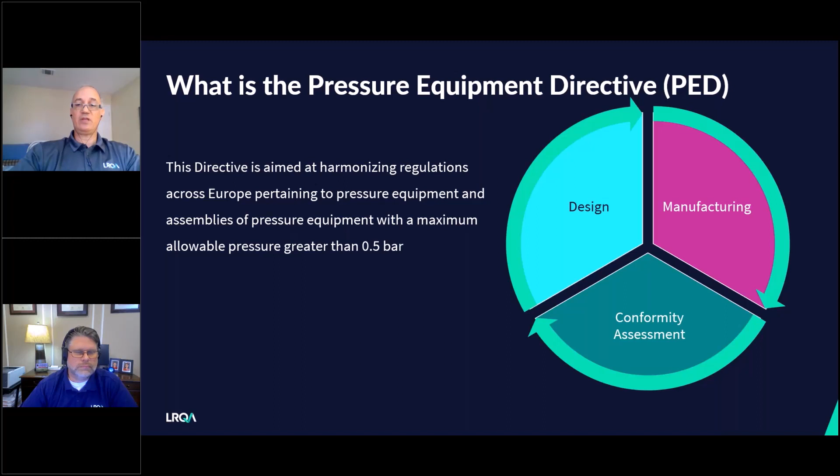A few examples are simple pressure vessels covered by the Simple Pressure Vessel Directive, transportable pressure equipment, equipment specifically designed for nuclear use, failure of which may cause emission of radioactivity, engines, including turbines and internal combustion engines, steam engines, gas or steam turbines, turbogenerators, compressors, pumps, and actuating devices. Vessels designed to contain liquids with a gas pressure above the liquid of not more than 0.5 bar. Please also note that PED does not deal with in-service requirements, which may be necessary to ensure the continued safe use of pressure equipment.

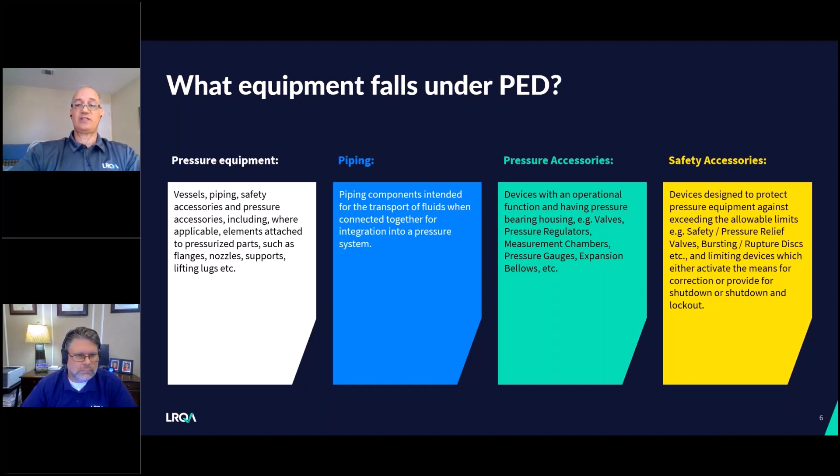What equipment falls under PED? These are pressure vessels, heat exchangers, horizontal or vertical pressure vessels, boilers, steam generators, fire extinguishers, pressure cookers, piping components, valves, actuators, pressure regulators, pressure or safety relief valves, and bursting or rupture discs, to name a few, as well as assemblies, which could range from simple assemblies such as a pressure cooker and fire extinguisher to complex assemblies such as water tube boilers, industrial installations, like refineries or chemical plants.

Dwayne, over to you, sir, for this slide. Thank you, Paris. Appreciate it.

Well, you may be asking yourself, what are the benefits of certification? Well, there are several major ones. The first one would be expanded markets and access to international recognition. And you do this by achieving compliance. You're able to expand and reach your organization's market and show global organizations that you're a serious player in this market. The second one would be legal compliance, a very important one here. By complying with this standard, you will ensure that you will not be found out of compliance and have to face fines or loss of business, which can be very significant.

Also, mitigating risk. By complying with PED, you'll ensure that you not only limit your risk and legal issues pertaining to compliance, but you'll mitigate them for the future and for your clients. Also, the last one would be quality assurance. We're going to ensure the quality and efficacy of your organization's products to make sure that your customers are compliant with the PED and happy with the quality that they receive. Moving on to the next slide, please, Paris.

Okay. Well, who are the economic operator roles? Well, there's the manufacturer. As you can see here, that's any natural or legal person who manufactures pressure equipment and or assembly or has such equipment or assembly designed or manufactured and markets that pressure equipment or assembly under his name or trademark, or uses it for his own purpose. Then we also have the conformity assessment body. This is any natural or legal person appointed by a member state that performs conformity assessment activities, including calibration, testing, certification, and of course, inspection.

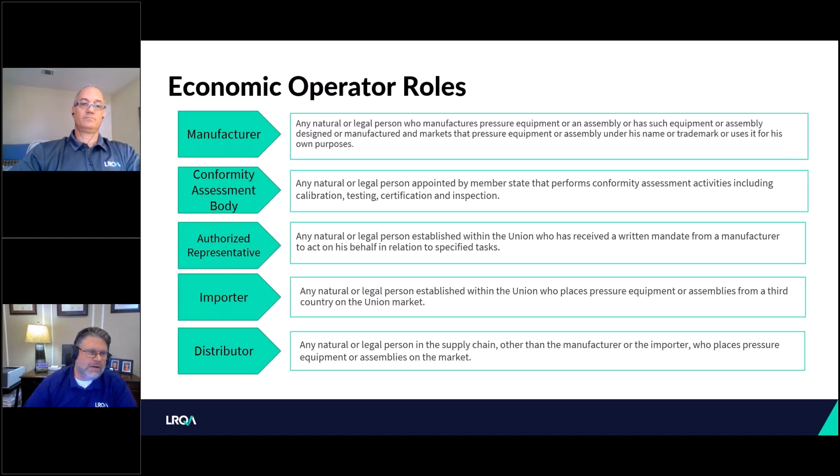And lastly, the distributor. This is any natural or legal person in the supply chain, other than the manufacturer or importer, who places pressure equipment or assemblies on the market. Thank you, Paris. Back to you, sir.

Thank you. Thanks, Dwayne. We will talk about the essential safety requirements of the directive. The essential safety requirements are detailed in Annex 1 of PED, and we could say that they are the technical part of the directive.

They have several sections. First are the preliminary observations, according to which the manufacturer has to analyze the hazards and risks in order to identify those which apply to his equipment due to pressure. He must then design and fabricate the equipment based on his analysis.

As general requirements, we have the protection principles. As per design, the equipment must be designed for adequate strength and safety in operations. Manufacturing covers inspection requirements, permanent joining, testing and marking, as well as the operating instructions the manufacturer must provide.

There are specific requirements for materials, and we will discuss them later in more detail. The specific pressure equipment requirements cover fired or otherwise heated equipment with a risk of overheating, and piping. Last but not least, there are specific quantitative requirements for certain pressure equipment which cover allowable stresses, test pressure, joint coefficients, pressure limiting devices, ductility, and toughness.

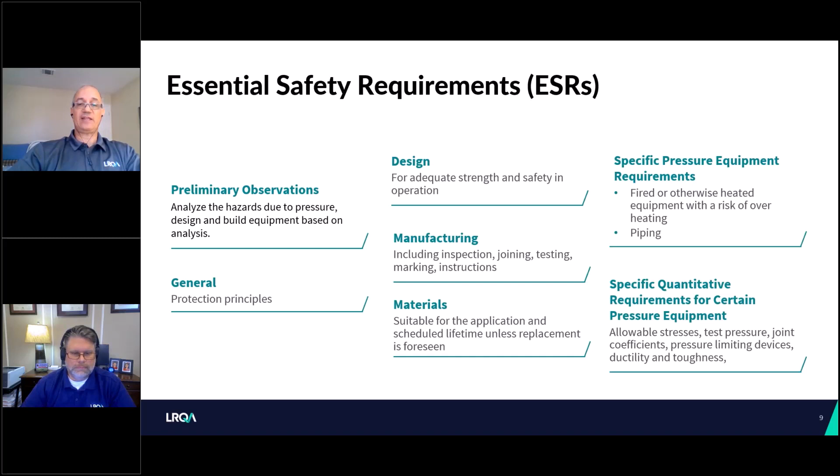The product classification. How do we classify the pressure equipment under PED? To know how PED will apply to specific items of pressure equipment, the equipment must be classified by category according to its perceived level of hazard due to pressure.

Equipment of relatively low hazard will be required to be manufactured according to sound engineering practice, or SEP. Equipment that is classified as a higher hazard than sound engineering practice is required to meet the relevant essential safety requirements and on that account to be CE marked. It is allocated in ascending order of that hazard to one of the categories 1, 2, 3, or 4.

Please note that PED is a risk-based directive. The higher the risk, the more the involvement of the notified body. Please also bear in mind that SEP equipment cannot be CE marked against PED. The following table summarizes which charts or tables should be used for the various types of equipment.

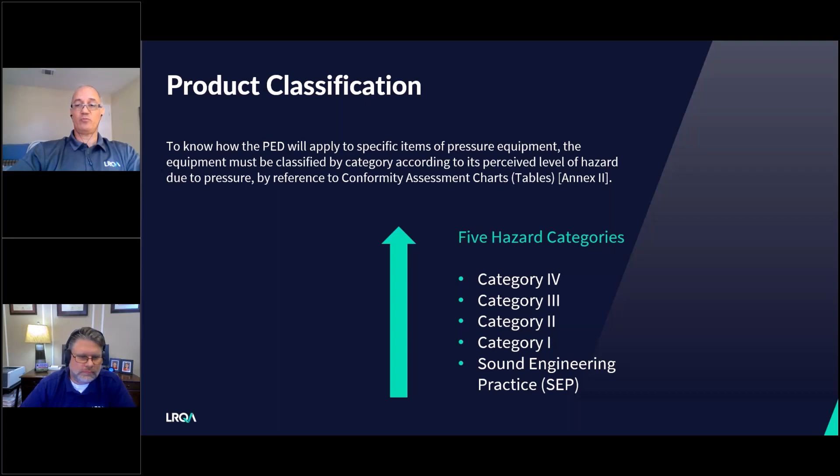Here we have the product classification. There are 9 charts. 1 through 4 are for pressure vessels, 5 is for steam generators, and 6 through 9 are for piping.

To select which chart is applicable to a pressure equipment, we need to know the state of its content, if it's gas or liquid, as we can see here, and the fluid group, 1 or 2. Group 1 is for dangerous fluids such as toxic, corrosive, flammable, explosive, lethal, etc., and group 2 is for anything else not in group 1.

As an example, if we have an unfired pressure vessel according to ASME Section 8 Division 1 for propane, which is gas group 1, then the relevant chart, as we can see, is chart 1.

Having decided which chart applies to our pressure equipment, and by knowing the maximum allowable pressure and volume for vessels or nominal diameter for piping, we can calculate the risk category of the equipment. For the calculation of risk category, LRQA has created a PED calculator which is available for use on cell phones, tablets, laptops, and desktops. Dwayne, I'm handing over to you to say a few more words about our PED calculator.

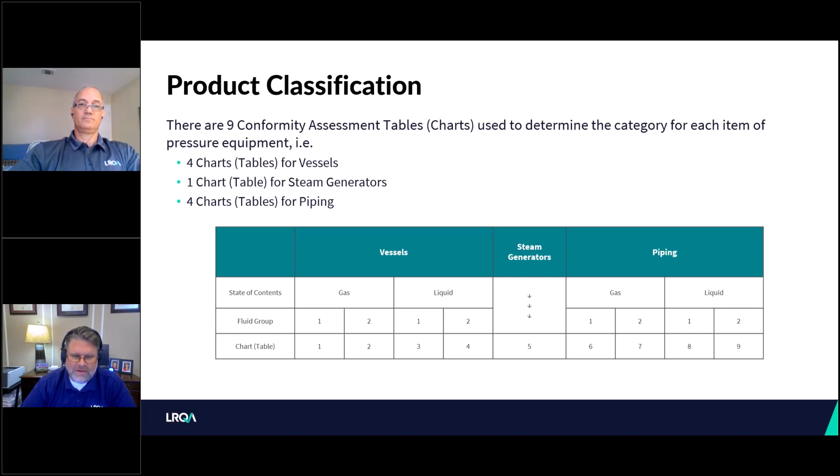Thank you, Paris. Let's see. It looks like the pressure equipment calculator has been on the LRQA website for the last few years. It's one of our most popular downloads, and it's really been beneficial from the feedback we've received from our customers. In fact, we even offer a lot of training that comes out of the PED calculator, as we follow up with the customer after they've done their calculations and see what actual products they need from LRQA. Excellent product, great feedback, and that's what I have on the PED calculator. Thanks, Paris. Thank you.

Now we are moving to the conformity assessment modules. There are 12 conformity assessment procedures or modules. All modules except Module A require notified body involvement. Each module describes what the manufacturer must do to demonstrate compliance with PED, as well as the level of involvement of the notified body, what are its obligations, and what examination and tests are required.

There are standalone modules such as A, A2, G, H, H1, or combinations of modules such as B design plus D, B production plus F, etc.

Module B is a type examination module and can be either design type or production type. On design type, the notified body must examine the design of the pressure equipment, whilst on production type, in addition to the design examination, the notified body must also witness the type tests.

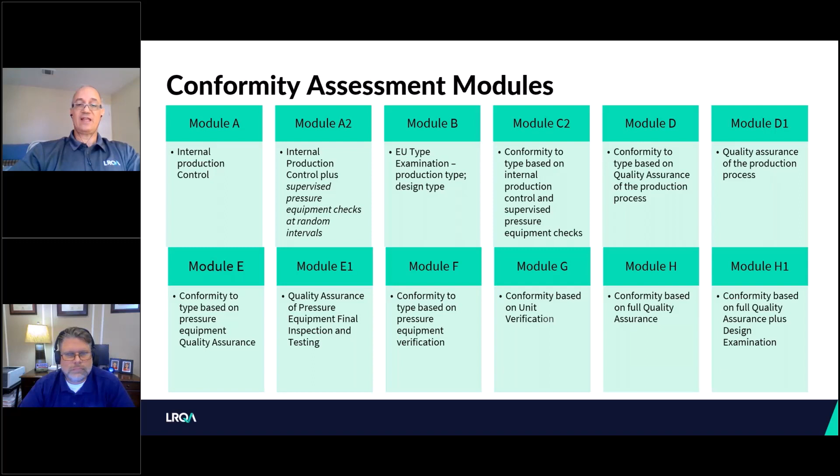On this table, we have the modules a manufacturer can select to demonstrate compliance to PED depending on the risk category of his equipment. There are a couple of factors to be considered, like series production or unit production, and if the manufacturer operates a PED-compliant quality management system or not.

The pressure equipment manufacturer can select a higher category module if he wants to. As an example, for category 2 equipment, instead of selecting module A2, D1, or E1, he could select H, or B design plus F, or B design plus D.

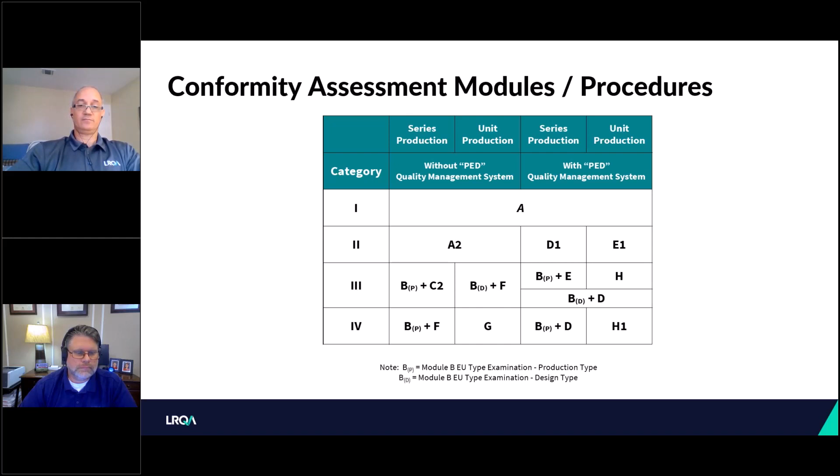Certification of welding and other permanent joining.

Permanent joining of components which contribute to the pressure resistance of equipment, and components which are directly attached to them, shall be carried out by suitably qualified personnel according to suitable operating procedures.

For pressure equipment and assemblies of category 2, 3, and 4, all welding procedures and personnel must be approved by a notified body or a recognized third-party organization.

If non-European harmonized standards have been selected for the qualification of welding procedures and of welders or weld operators, like ASME Section 9, then additional tests must be carried out according to the relevant European harmonized standards, since PED asks for equivalent examination and tests.

Please note that permanent joining is not just welding. It could be other types of joining such as brazing, expansion, gluing, frettage, or riveting.

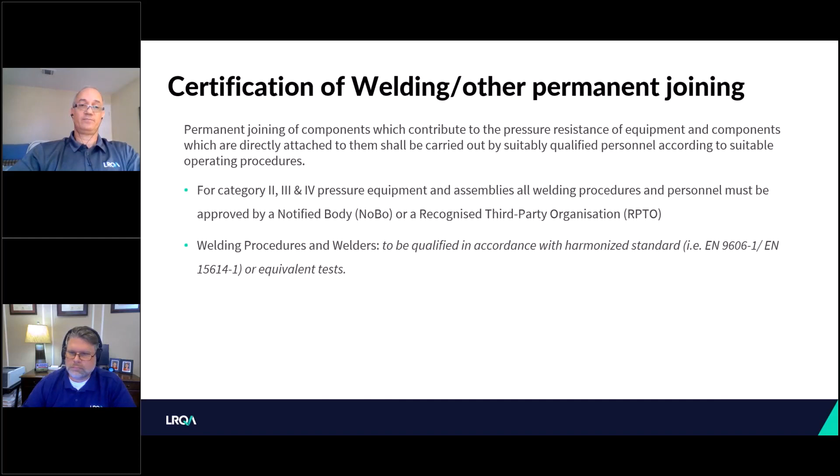We have specific requirements for materials. The pressure equipment manufacturer must select materials as part of his design process. The selected material must meet the relevant essential safety requirements, must be certified and traceable to the original mill certificate.

The pressure equipment manufacturer must provide in his technical documentation elements relating to the compliance with the material specification of the directive in one of the following forms: by using materials which comply with European harmonized standards, or by using materials covered by a European approval for materials.

Very few materials are covered by a European approval, and in case this is required, the notified body must be involved. The materials approved through this process are listed in the PED webpage of the European Union.

And the third option is by a particular material appraisal. PMA is the most common way for approval of non-European harmonized grades, such as ASME or ASTM materials.

For equipment in categories 3 and 4, PMAs must be approved by the notified body in charge. Hence, PMAs are part of the design documentation the pressure equipment manufacturer must submit to the notified body for review and approval.

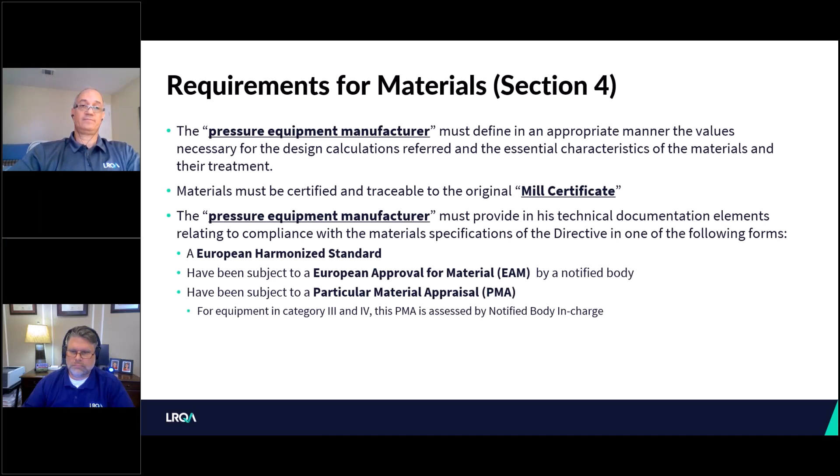As we said, materials must be certified and traceable to the original mill certificate. For main pressure-bearing parts of equipment in categories 2, 3, and 4, the certification must take the form of specific product control. In practice, this means type 3.1 or 3.2 material certificate per EN 10204.

Where material manufacturers have an appropriate quality assurance system certified by a competent body established within the Union and having undergone a specific assessment for materials, certificates issued by the manufacturer are presumed to certify conformity with the relevant requirements of this point. We would like to clarify that this requirement is applicable to the material manufacturer, such as steel mills, pipe mills, foundries, forging shops, etc., and not to the pressure equipment manufacturer.

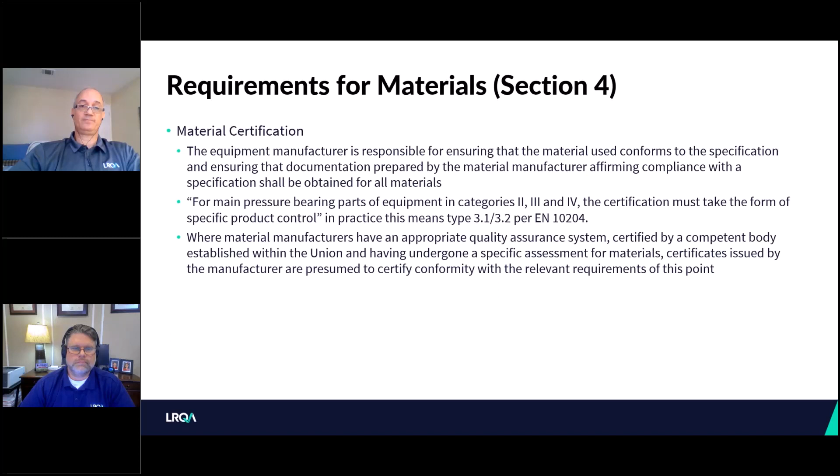Dwayne, over to you, sir.

All right, thanks, Paris. This slide is discussing notified body's involvement. So LRQA is a notified body, and this flow here may or may not apply to you depending on the level that you're required to get for your PED, but we'll go through all of them right now anyway.

Usually from the beginning, we do the design review or appraisal, and that will lead to the inspection side of it, where you get boots on the ground there usually.

And then the surveillance of production or inspection and quality assurance that gets involved. Then we have the approval of permanent joining, the procedures and operations.

And then approval of non-destructive testing or NDT operators. Then we move on to material certification and assessment of your PMAs, your Cat 3s and Cat 4s.

Finally, you're moving on to European approval of materials. And lastly, the notified body's involvement increases with the pressure risk of each category. So please keep that in mind.

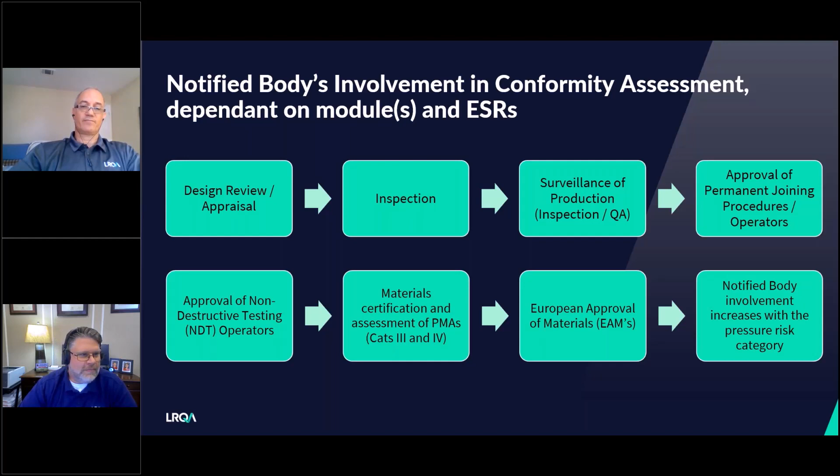Thank you, Paris. Thank you.

And equipment marking and labeling. Point 3.3 of Annex 1 of PED details the marking and labeling requirements.

For all pressure equipment, the following information must be provided: name and address of manufacturer or importer, the year of manufacture, the identification of the pressure equipment like a serial number or type number or batch number or model, whatever it is applicable.

The essential minimum and maximum allowable limits such as min and max temperature, design pressure, etc.

Furthermore, other information depending on the type of equipment shall be provided, as well as any other information or warnings necessary for the safe operation.

Please note that CE marking signifies compliance with all applicable EU directives. Therefore, the pressure equipment manufacturer must consider other EU directives which might be applicable to his equipment.

If a notified body has been involved in the certification process based on the selected module, then his 4-digit identification number must be placed next to the CE mark.

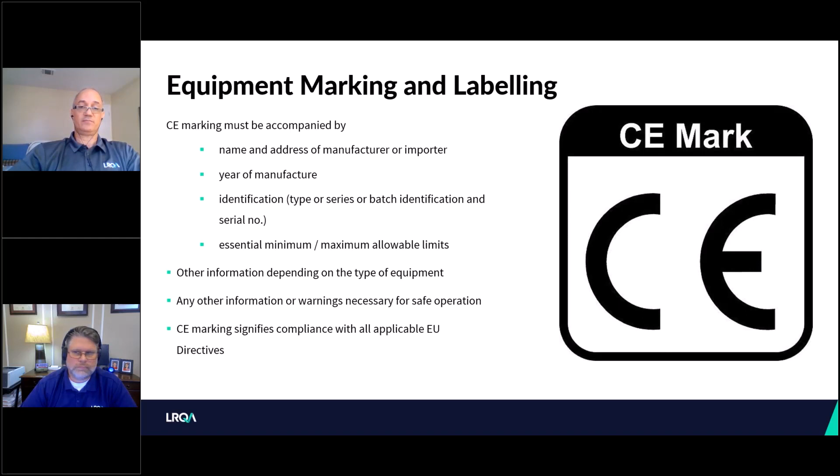And then we have the EU Declaration of Conformity, which is detailed in Annex 4 of the directive. The EU Declaration of Conformity is a document issued by the equipment manufacturer and must be available and presented to the authorities and the end user.

In this, we have the name and address of the manufacturer, the description of the pressure equipment or assembly, the conformity assessment procedure followed (this is the module), the name and address of the notified body as well as its identification number, a reference to any EU certification applicable, and the harmonized standards used during the certification process, like for design or inspection and testing of the equipment.

Other standards applied, in this case, could be non-harmonized standards like ASME Section 9 or Section 8, or any other well-known code used for design and fabrication.

Other applicable EU directives, any reference to EU type examination certificate or other certificates issued for compliance. And at the end, we have the particulars of the person who is signing the EU declaration on behalf of the manufacturer.

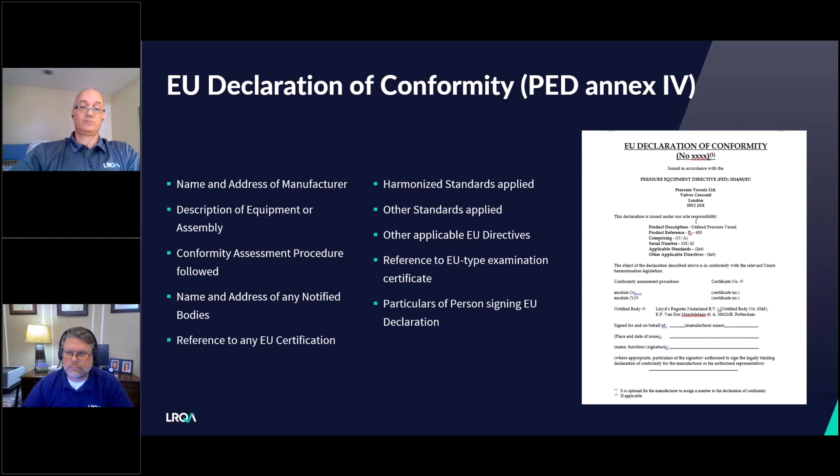And now we can move to the Q&A session. Karen, over to you, please.